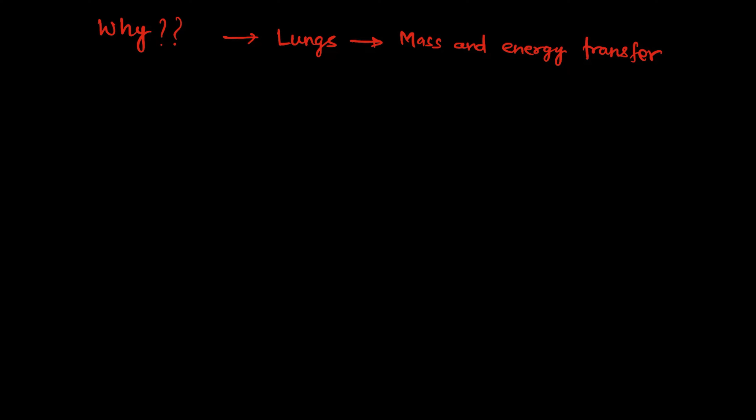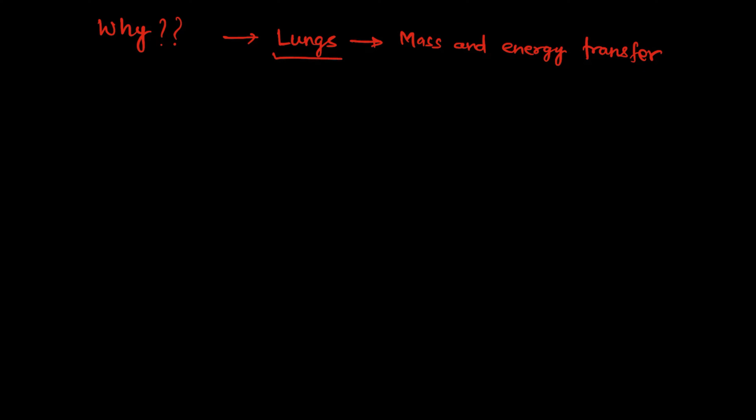For example, you are breathing in air and then exhaling carbon dioxide, and there is some heat transfer going on there. Take another example of air conditioning. There also, there are certain kinds of mass and energy transfer, and that can be explained using principles of thermodynamics.

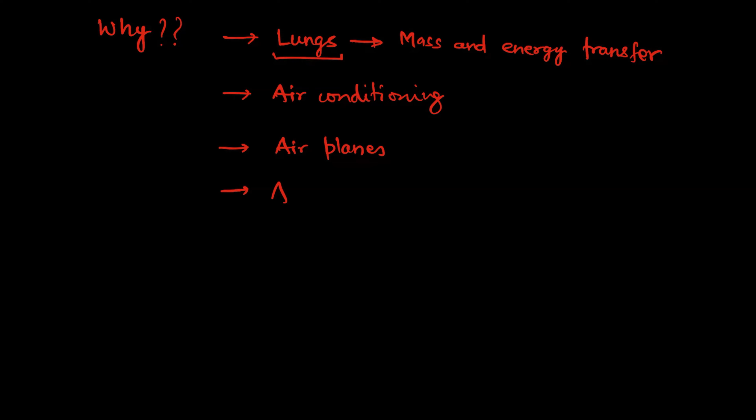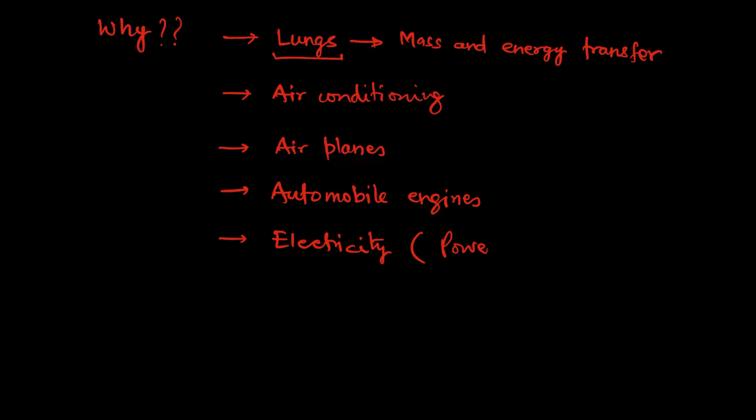Then we have airplanes, automobile engines, and how can we forget electricity. Electricity, which comes from power plants, also works on the principles of thermodynamics.

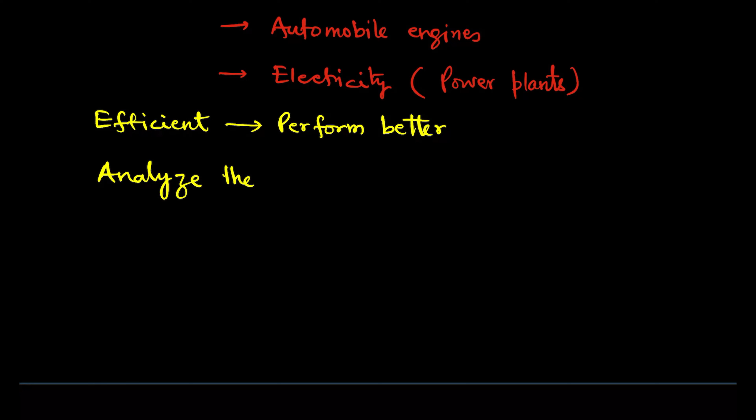And to make all these systems efficient, so that they can perform better, or to analyze these systems, we need principles of thermodynamics. And that's why we need to study it.

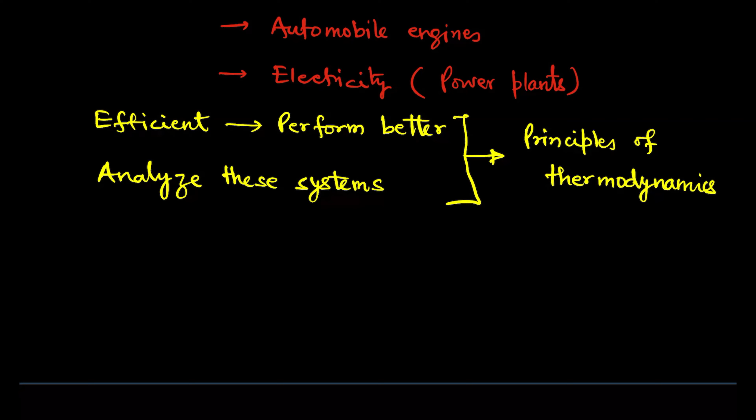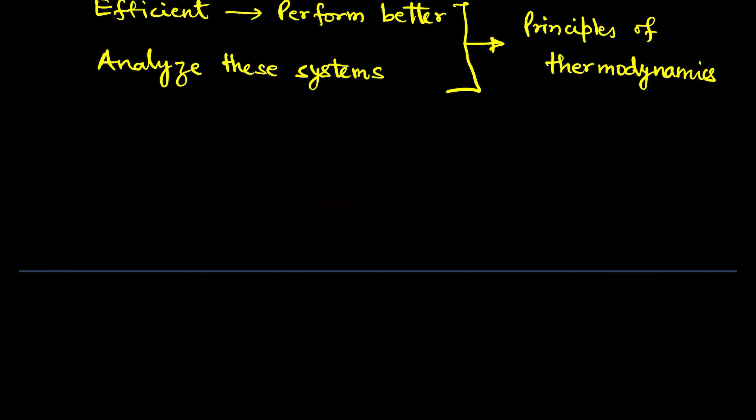Now, once we are convinced that we need principles of thermodynamics, or we need to study thermodynamics to better design these systems, we can go further in our lecture to check how we can study these systems. So how to proceed?

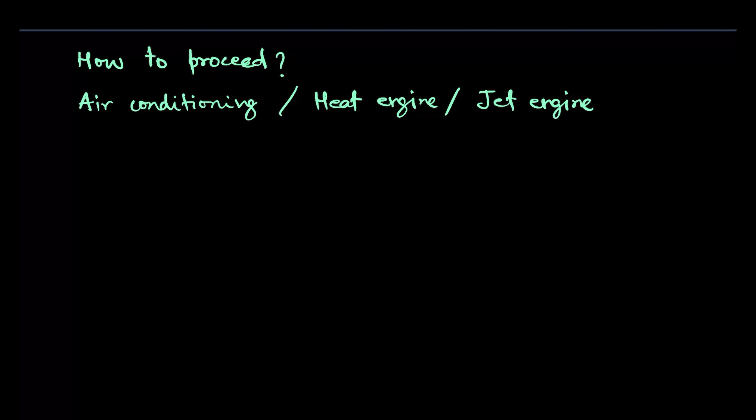For example, if you want to study an air conditioning device, or a heat engine, or a jet engine, whatever—to study all these kinds of devices, we need to define a term which you will be hearing a lot in the upcoming lectures. And that term is called system. You might already be knowing about this.

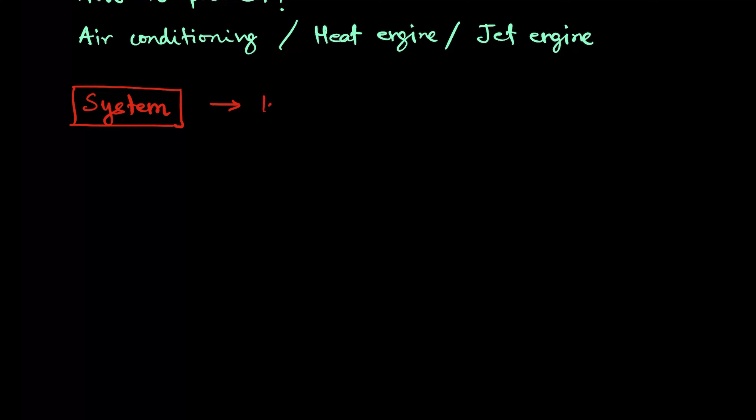It is not like a government system or any other system. In thermodynamics, we say that a system can be defined as whatever we want to study. Whatever is of our concern, that we can call a system. You're not convinced, right, about what is a system?

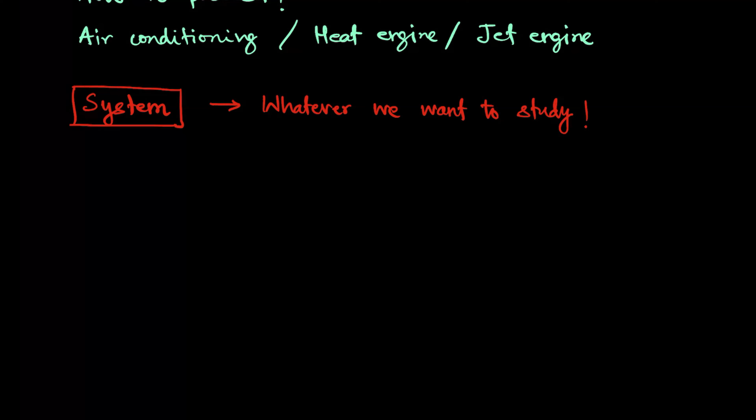So we need a more technical approach. It is not like whenever somebody asks what is a system, you just say whatever you want to study, and then they ask, what do you mean? To give it a more technical perspective, we can say that it can be a fixed quantity of matter, or a region of space. Now these terms are very carefully written.

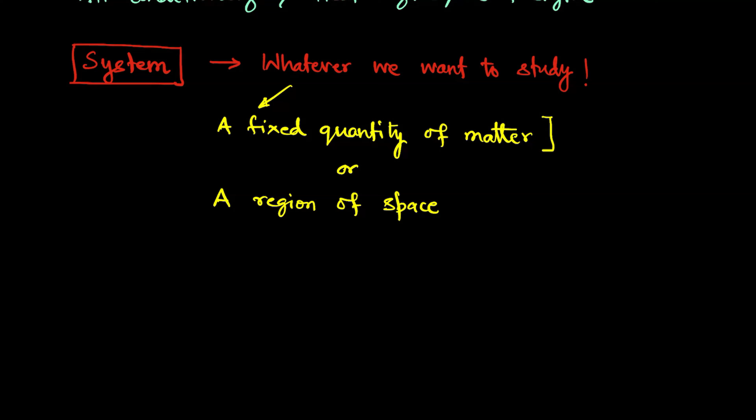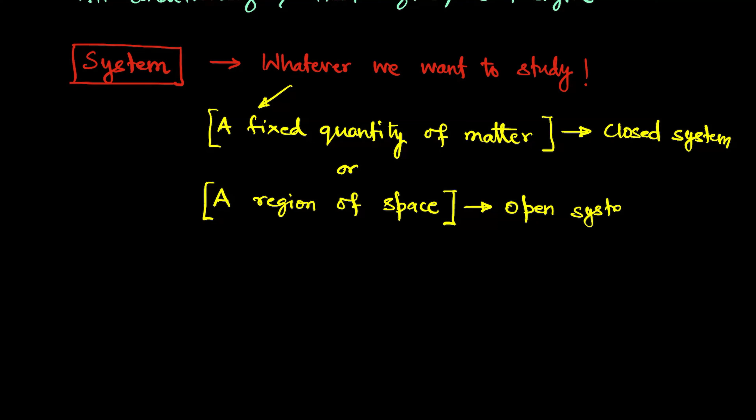Because you will see after some time that a fixed quantity of matter, we will further define as a closed system, and a region of space, we call an open system. So what is a fixed quantity of matter? For example, you can take a piston cylinder arrangement.

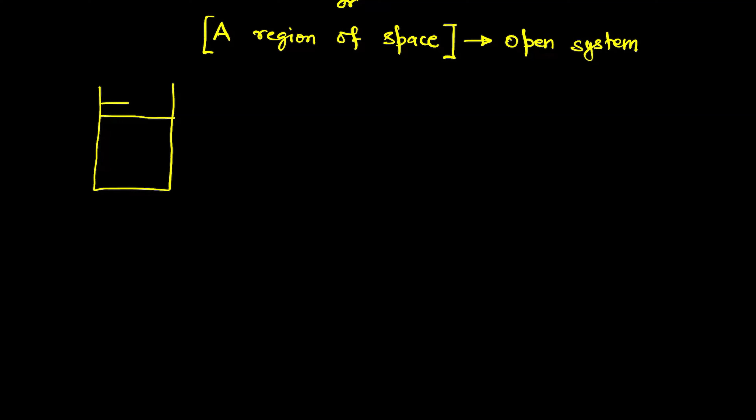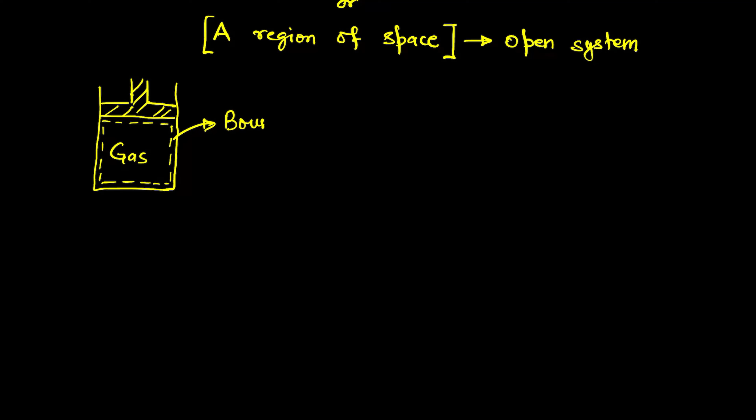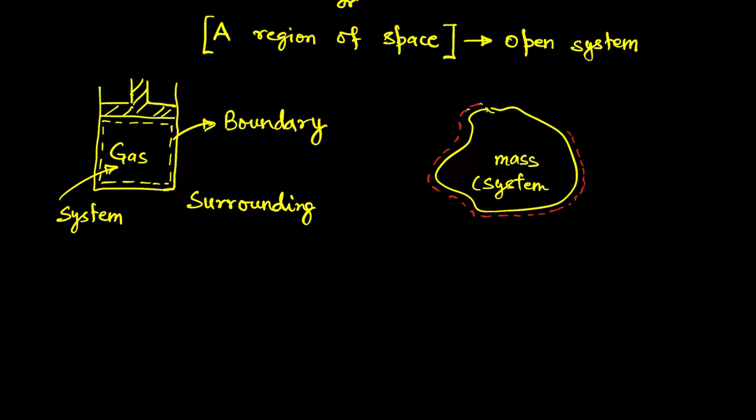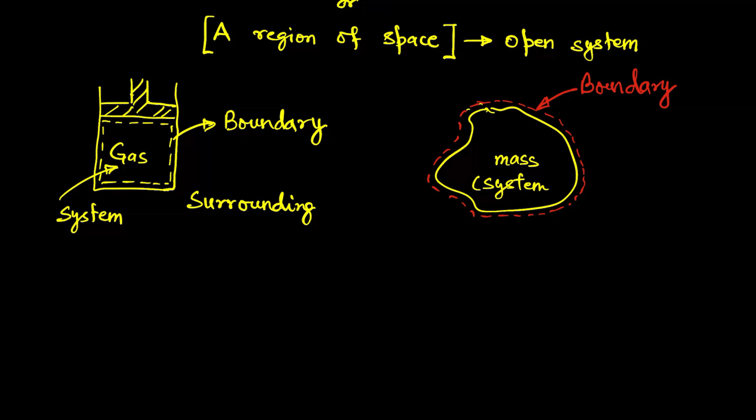Here is my piston cylinder arrangement. Suppose we have a certain amount of gas in it. Then we can call this gas, which is inside this boundary, the system. I have used the term boundary here, which separates the system from surroundings. So suppose if you are considering this region, which has a fixed mass, and call it the system, I can put a dotted line around this, which encloses this mass, and I call this the boundary. Whatever is outside, I will call the surroundings.

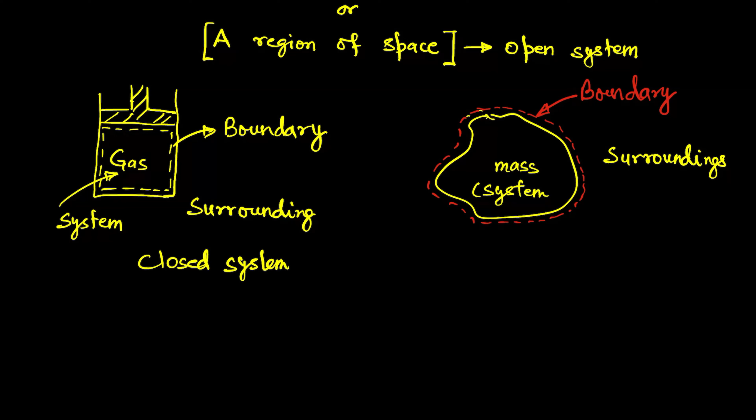So this is an example of a closed system, and the example of lungs, where I told you, okay, suppose if you have... yeah, I'm not good at drawing, so let us avoid drawing the lungs.

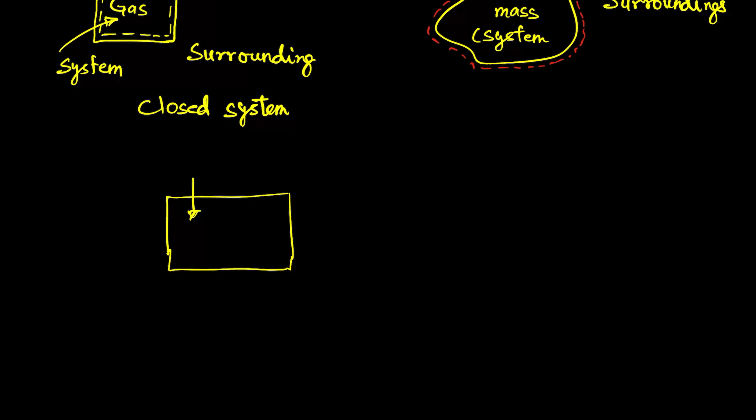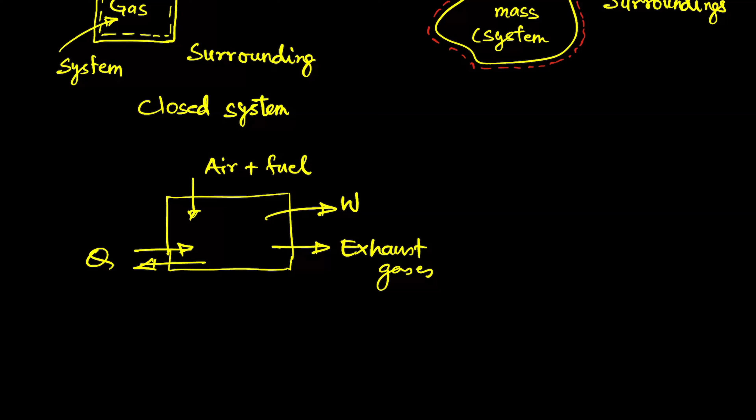Or suppose there is an automobile engine where some air plus fuel is entering, then some exhaust gases are leaving, and there is also some energy transfer like heat, energy transfer like work. So these things are going on here, and we call this kind of system an open system. And we define a system boundary here as something like this.

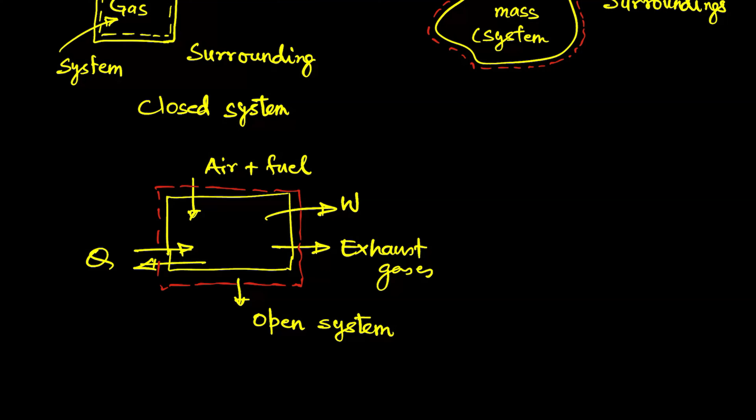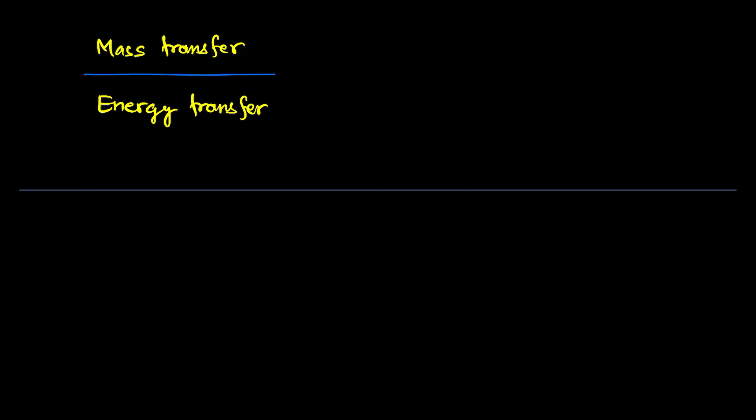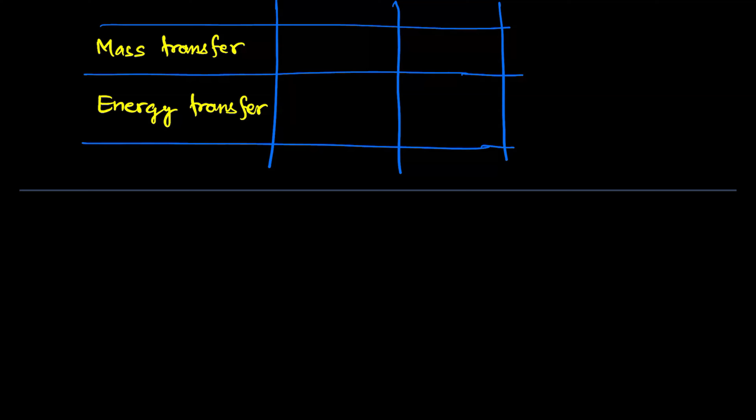And there are more aspects to the closed and open systems. If we try to list all the characteristics of open and closed systems, we can relate it to mass transfer and energy transfer. Open system: mass transfer is allowed, energy transfer is also allowed. Closed system: mass transfer is not allowed, but energy transfer is allowed.

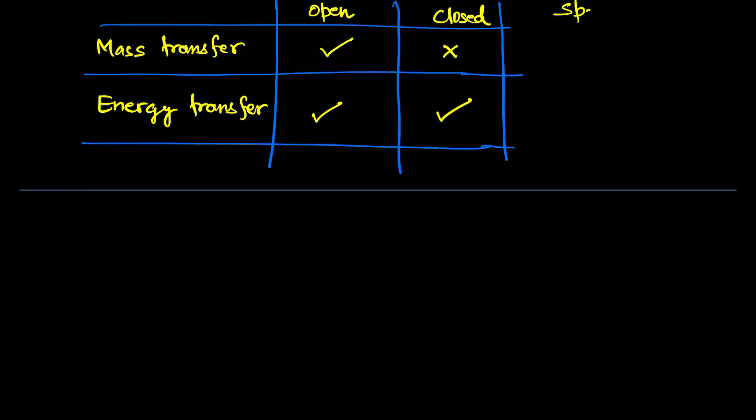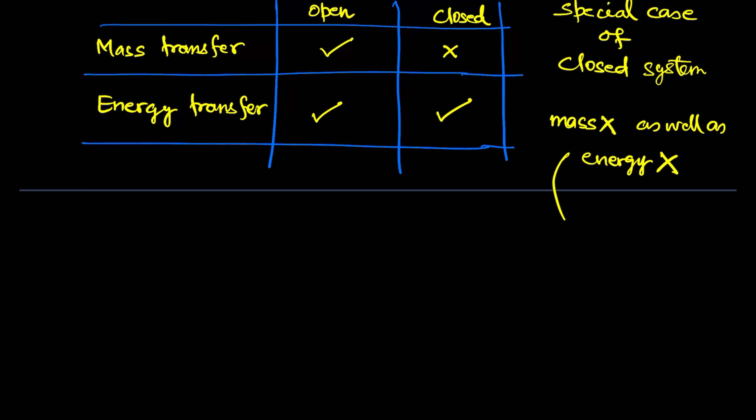And suppose there is a special case of a closed system, where mass transfer is not allowed, as well as energy transfer is also not allowed. This kind of system is called an isolated system.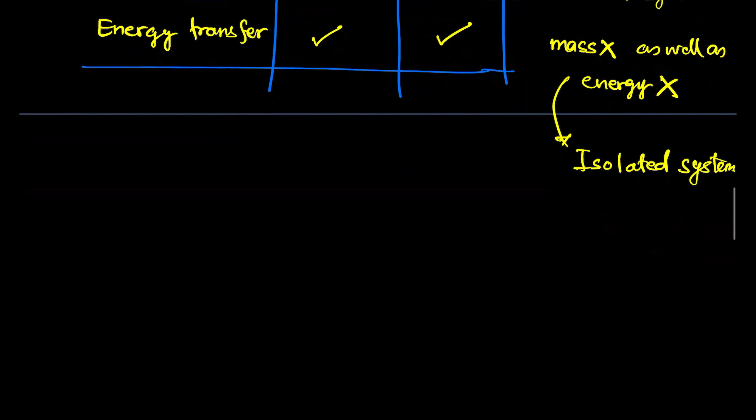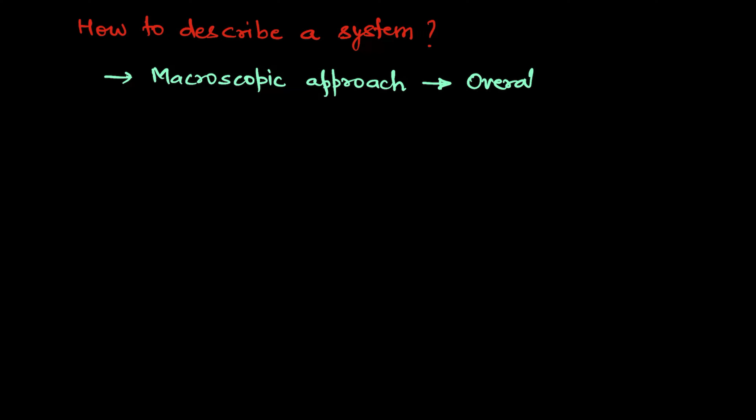Okay, having known this open and closed system, now the next step is how to describe a system. To describe a system, we generally take two approaches. One is the macroscopic approach, where we are mostly concerned about the overall behavior of the system. For example, you can say that gas is at a certain pressure, gas is at a certain temperature, and we are not concerned about what is happening at the molecular level. So we are just considering the overall behavior or overall characteristic of the system, and we call that the macroscopic approach.

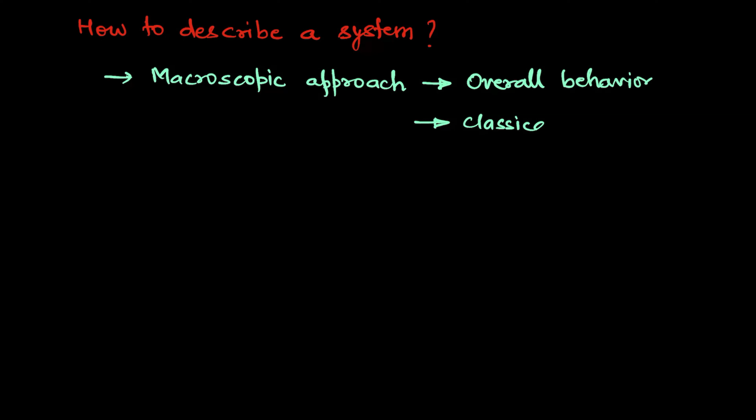And the thermodynamics which considers this macroscopic approach for study, we call classical thermodynamics.

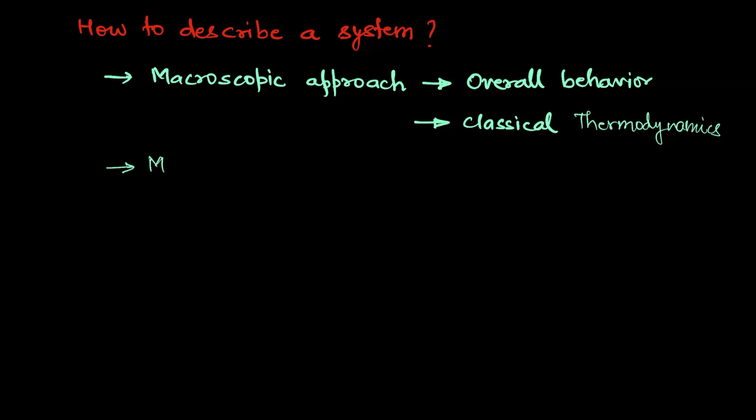Now there are other approaches. For example, how will we call it when at the molecular level, if we are considering the system and its characteristics at the molecular level, then we call it the microscopic approach. Here we are concerned about particle level or molecular level behavior also.

And this we call the microscopic approach. And here the study of thermodynamics, which basically considers this molecular level behavior, we call statistical thermodynamics. One thing to note is our concern here in this course is basically classical thermodynamics. That is our focus here. So in this course we will be discussing this macroscopic approach, which we call classical thermodynamics. This is going to be our approach for this whole lecture.

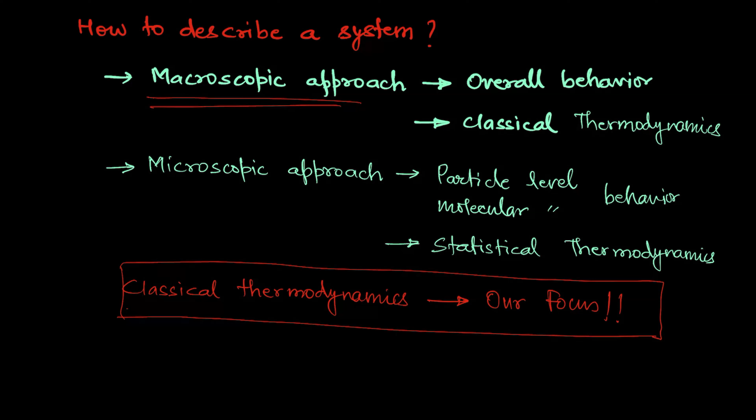Now we know that we are going to consider this macroscopic behavior, or the overall behavior of our systems. To define this macroscopic view of thermodynamics, we need certain other quantities, and one of such quantities is called property. Now we need to define what is property. So property is basically a characteristic of a system, or we can also say that property is a macroscopic characteristic of a system.

To be more precise, a macroscopic characteristic of a system to which a numerical value can be assigned. And this term here is very important: the term 'numerical value can be assigned' is very, very important, because that is how we define the property.

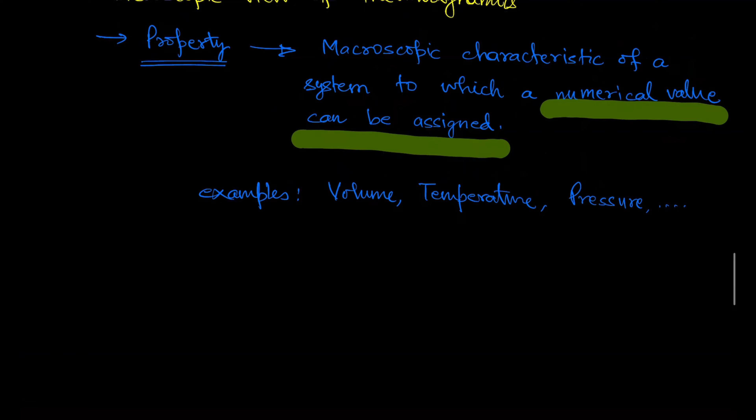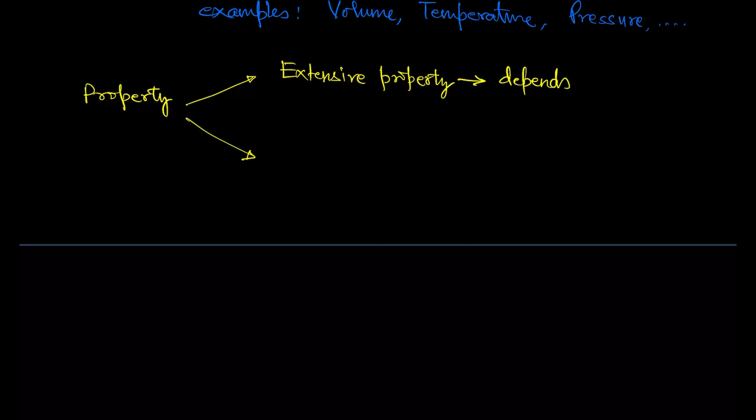Now this property can be further divided or classified into two categories. One is extensive property, which depends on size. For example, volume, mass. And then there is another class which is called intensive property.

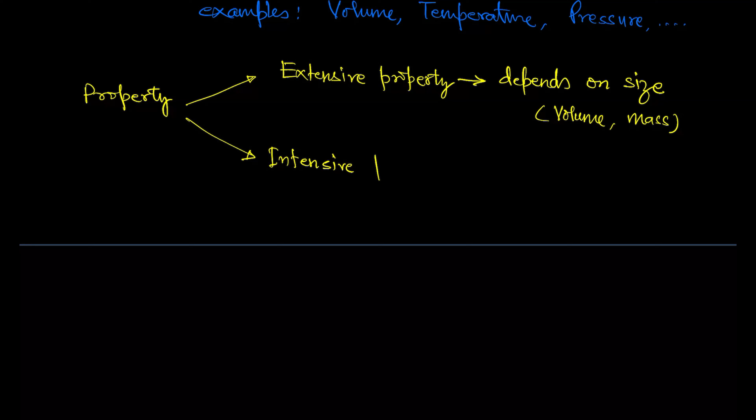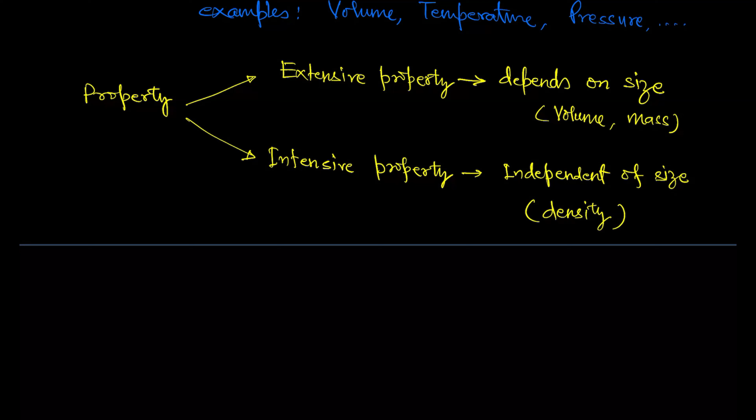Intensive property is independent of size, for example density, or whatever the extensive properties. If you divide the extensive properties by mass, suppose you have some extensive property and divide it by mass, then it becomes intensive property, because now your extensive property per unit mass is actually independent of mass. So you can call it intensive property.

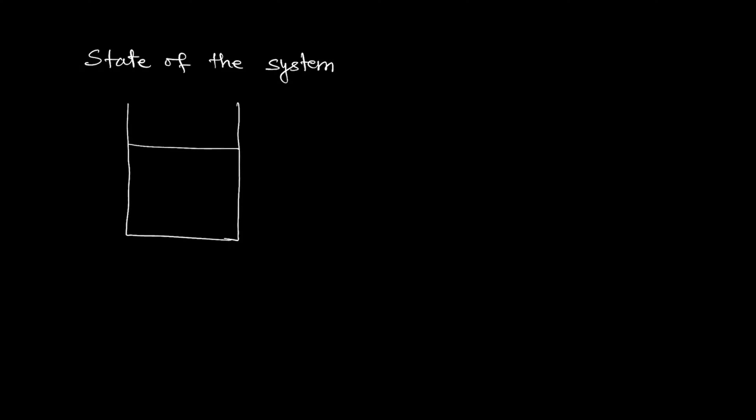Now, once you have defined the system and the properties, there is another term we need to define, called the state of the system. Suppose we again take the example of the piston cylinder. So if this is our piston and there is some gas in it at temperature T and pressure P, we can call this gas at some state which is defined by these properties.

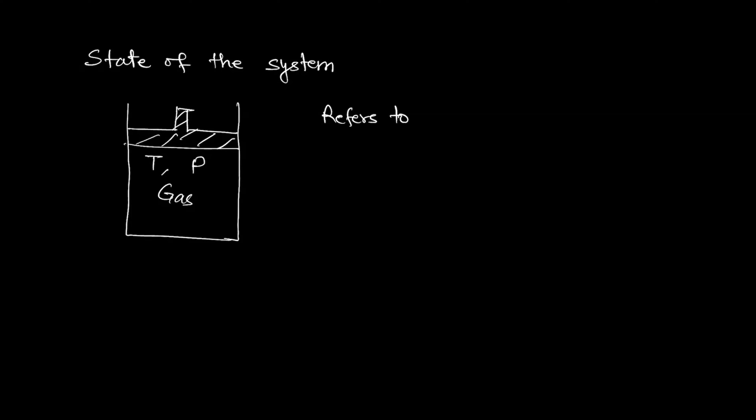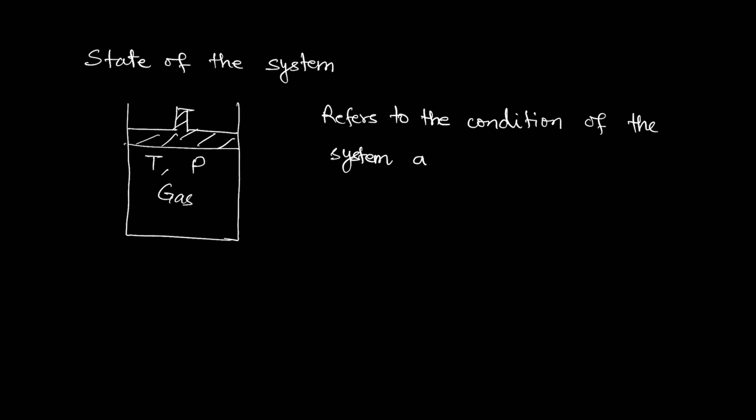So this state basically refers to the condition of the system as described by its properties.

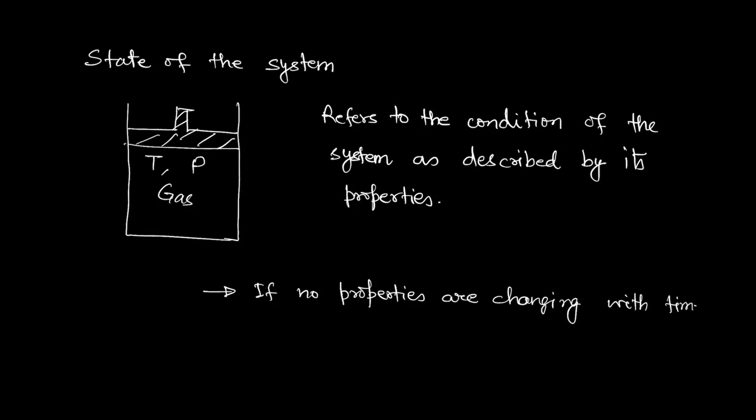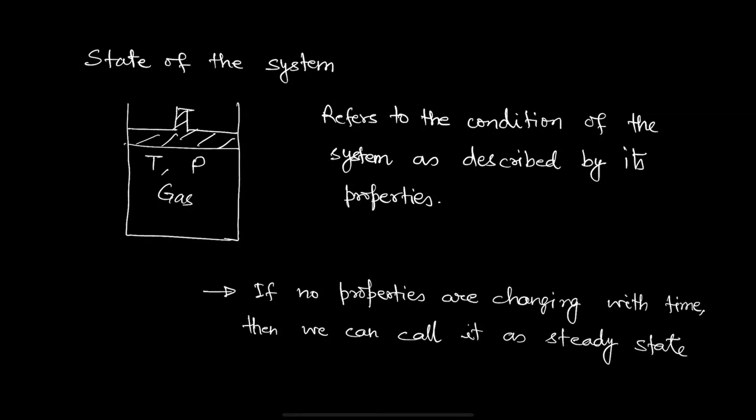And if no properties are changing with time, then we can call it steady state.

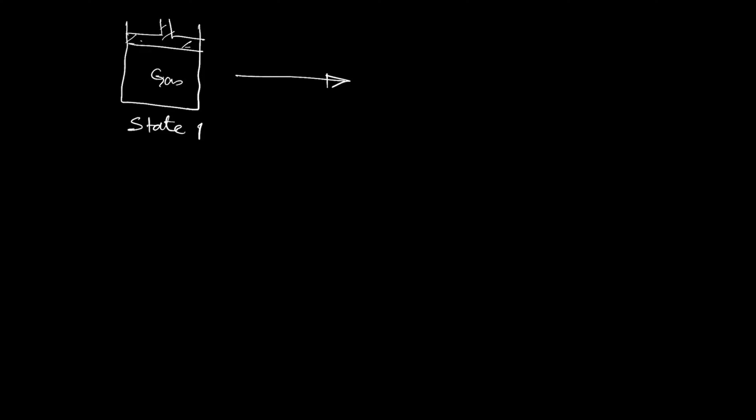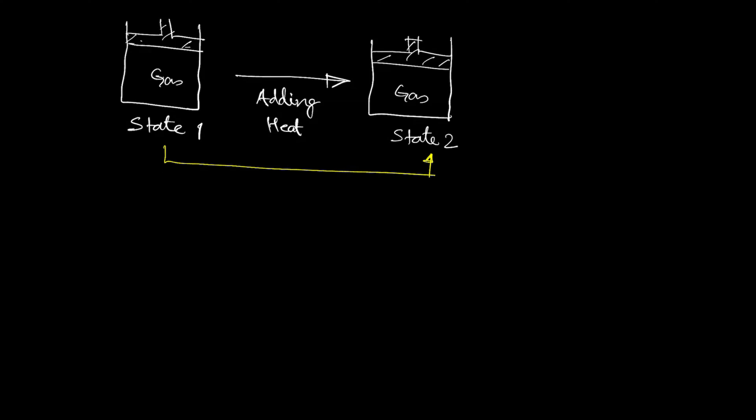Now there comes another thing. Suppose earlier this gas in the piston cylinder was at state 1, and by something, for example adding heat, the system now has a different set of properties, like different temperature and different pressure. It has gone to state 2. So from state 1 to state 2, whatever you did, like adding heat, we can call this a process.

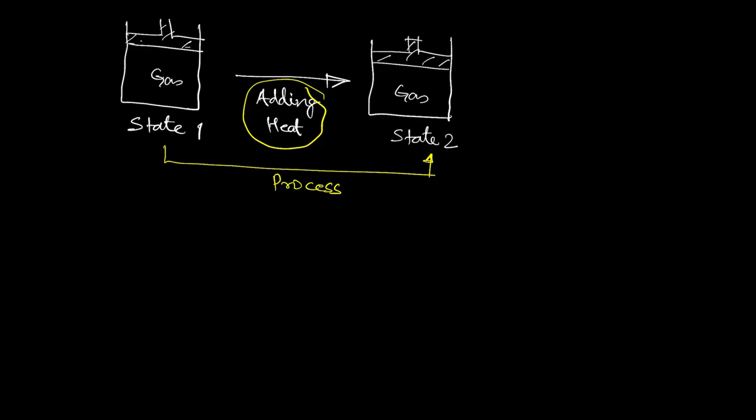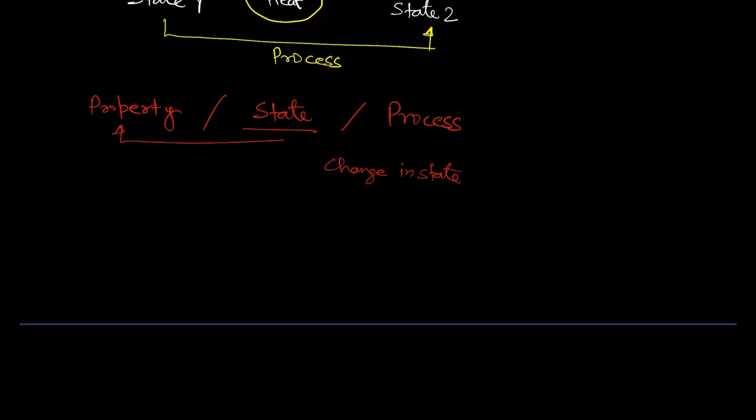So here basically we learned three things: property, state, and process. State is defined by properties, and change in state is given by process.

Now we need to discuss a very important term, which we all know from our mechanics class, but in thermodynamics this has a completely different meaning. We call it equilibrium.

In mechanics class, we know that equilibrium means just the balance of forces. But in thermodynamics, equilibrium means way more than that, which includes mechanical equilibrium, thermal equilibrium, and chemical equilibrium.

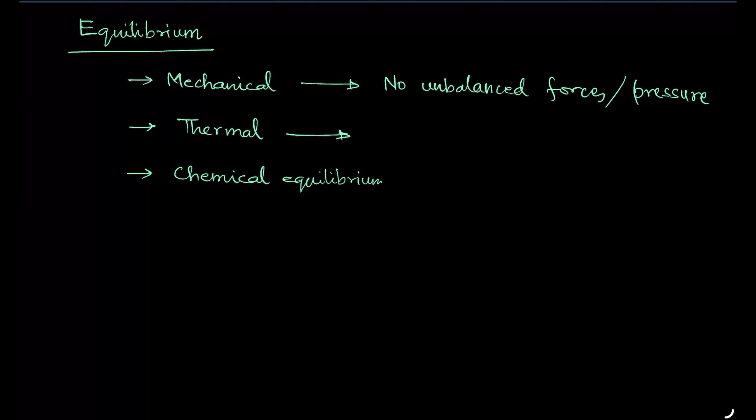Mechanical means no unbalanced forces or pressure. Thermal means no temperature difference, or no heat transfer. And chemical means no chemical reactions.

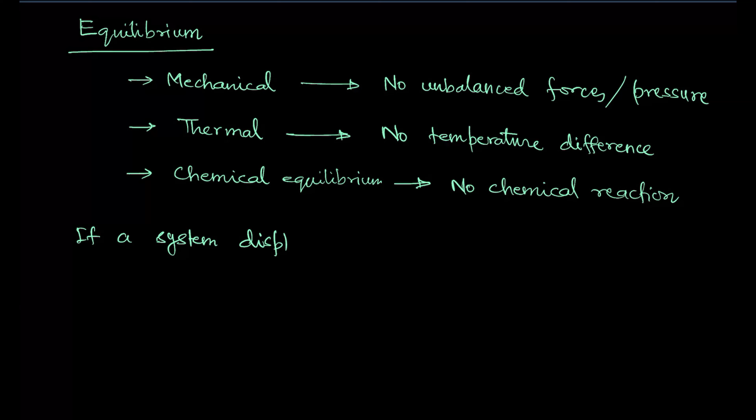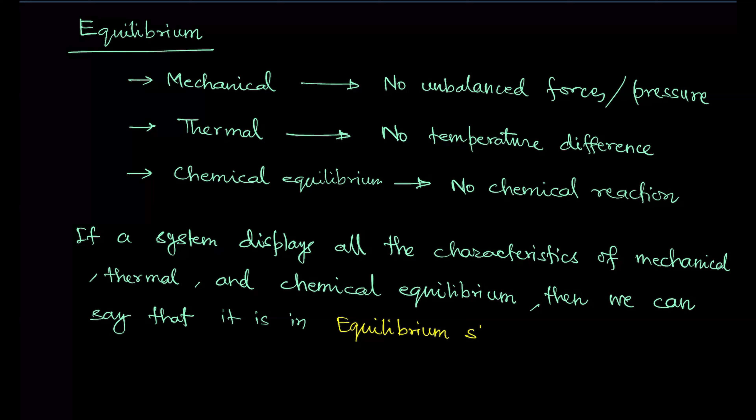And if a system displays all the characteristics of mechanical, thermal, and chemical equilibrium, then we can say that it is in equilibrium state, or thermodynamic equilibrium.

Also, to study thermodynamics, we need a basic concept like units and dimensions. From our high school physics classes, we know the unit of length is meter. So meter is the unit and length is the dimension. Then the unit of mass is kg, so kg is the unit and mass is the dimension.

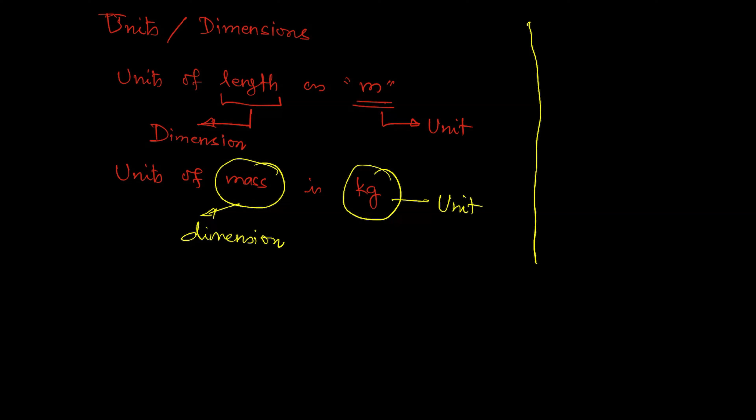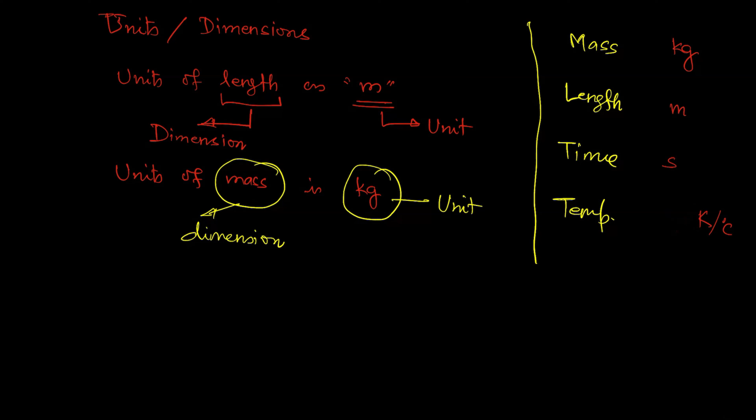And then if we talk about dimensions, we have mass, length, time, and temperature. These are 4 dimensions, and the corresponding units are kg, meter, second, and Kelvin or degree Celsius. Mass we generally represent with a square bracket and block letter M, then L, T, and theta for temperature.

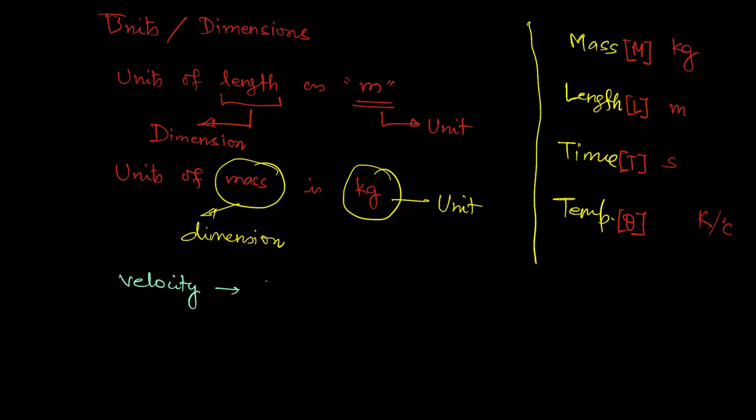So suppose if I am asking you to give me the dimensions of velocity, the dimension can be given as L over T in square brackets, and the unit can be given as meter per second. So this is dimension, this is unit.

Okay, and with this, let us finish this first part of the lecture here, and in the next lecture we will discuss some properties in detail, and they are specific volume, pressure, and temperature.